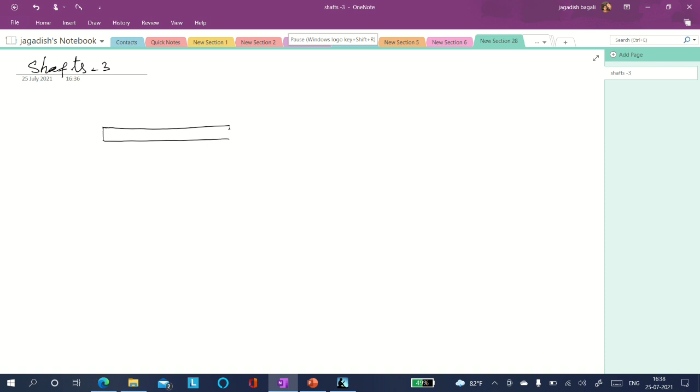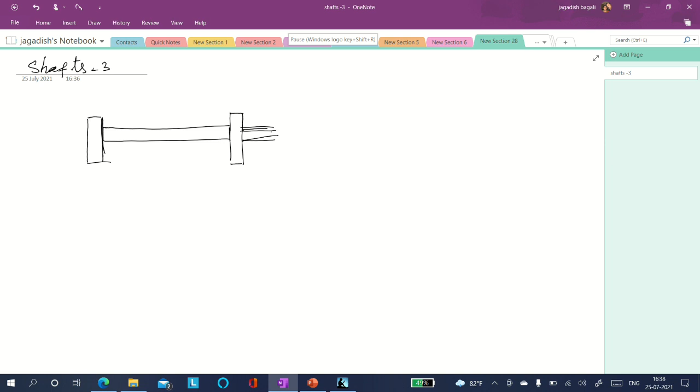ಸೊ ಹಾಗಂದ್ರೆ ಏನು ಅಂದ್ರೆ ಈ ತರ ಒಂದು ಆಕ್ಸಿಲ್ ಇದೆ. ಇಲ್ಲಿ ಏನಿದೆ, ವೀಲ್ ಇದೆ, ಆಕ್ಸಿಲ್ ವೀಲ್ ಇದೆ, ಇಲ್ಲೂ ಆಕ್ಸಿಲ್ ವೀಲ್ ಇದೆ. ಈ ಕಡೆ ಸೈಡ್ ಒಂದು ಬಾಕ್ಸ್ ಇದೆ, ಆಕ್ಸಿಲ್ ಬಾಕ್ಸ್ ಅಂತ ಕರೀತಾರೆ. ಈ ಸೈಡ್ ಒಂದು ಆಕ್ಸಿಲ್ ಬಾಕ್ಸ್ ಇದೆ.

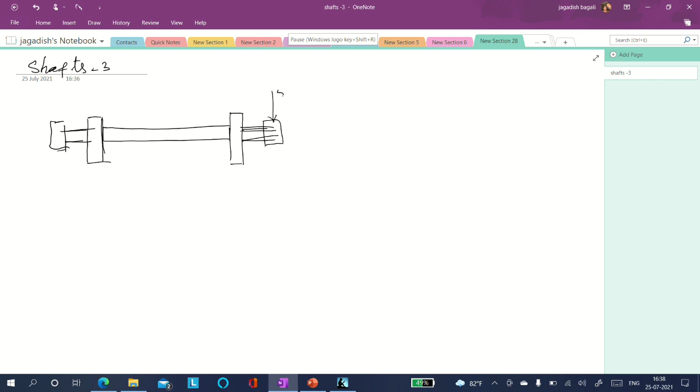ಇದ್ರ ಮೇಲೆ ಲೋಡ್ ಎಷ್ಟಿದೆ, 50 kN. ಇಲ್ಲೂ ಅಷ್ಟೇ 50 kN ಇದೆ. ಇಲ್ಲಿ ಎಷ್ಟು ಬಂದಿದೆ, ಇದು 1.4 ಮೀಟರ್ ಇದೆ. ಫೈಂಡ್ ದ ಡಯಾಮೀಟರ್ ಆಫ್ ಆಕ್ಸಿಲ್ ಬಿಟ್ವೀನ್ ವೀಲ್ಸ್ ಇಫ್ ದ ಸ್ಟ್ರೆಸ್ ಇಸ್ ನಾಟ್ ಟು ಎಕ್ಸೀಡ್ 100 MPa ಅಂತ ಇದೆ.

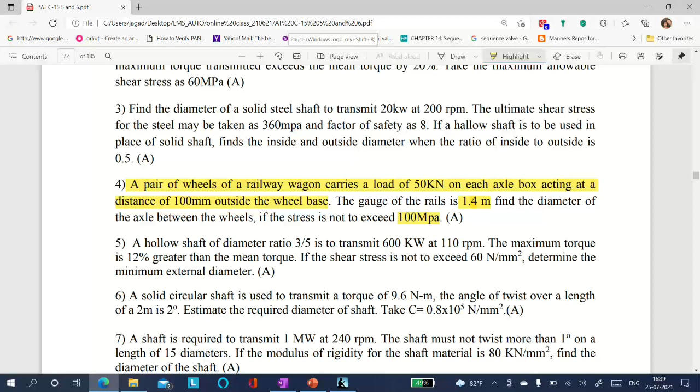ಸೊ ಇಲ್ಲಿ ಸಿಗ್ಮಾ ಡಿ ಅಂತ ಕರೀತಾರೆ, ಅಥವಾ ಸಿಗ್ಮಾ ಬಿ ಅನ್ಬೋದು ನೀವು, ಬೆಂಡಿಂಗ್ ಮೂಮೆಂಟ್ ಸಿಗ್ಮಾ ಬಿ ಇದೆಷ್ಟಿದೆ, 100 MPa ಇದೆ. ಓಕೆ, ಅಂದ್ರೆ ಇದ್ರದ್ದು ಅಲೋಯಬಲ್ ಬೆಂಡಿಂಗ್ ಸ್ಟ್ರೆಸ್, ಈ ಆಕ್ಸಿಲ್ ಮಟೀರಿಯಲ್ ಅಲೋಯಬಲ್ ಬೆಂಡಿಂಗ್ ಸ್ಟ್ರೆಸ್ ಎಷ್ಟಿದೆ, 100 MPa ಇದೆ.

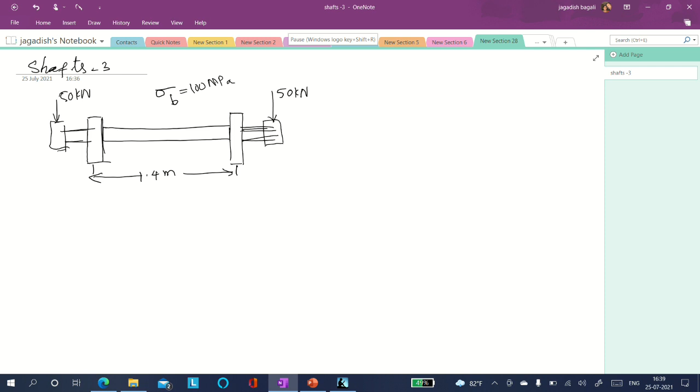ಸೊ ಇದ್ರದ್ದು ನಾವೇನ್ ಮಾಡ್ಬೇಕೀಗ, ಈ ತರ ಒಂದು ಸ್ಕೆಚ್ ಹಾಕೋಬೇಕಾಗತ್ತೆ. ಇದು ಫೋರ್ಸ್ ಡಯಾಗ್ರಾಮ್ ಅಂತ ಕರೀತಾರೆ, ಇದನ್ನ ಹಾಕಬೇಕಾಗತ್ತೆ. ಸೊ ಇಲ್ಲಿ ಎಷ್ಟಿದೆ, 50 kN ಇದೆ. ಇಲ್ಲಿ ಎಷ್ಟಿದೆ, 50 kN ಇದೆ.

ಇವು ಎರಡು ಸಪೋರ್ಟ್ ಪಾಯಿಂಟ್ ಎ, ಪಾಯಿಂಟ್ ಬಿ. ಸೊ ಇದನ್ನ ನಾವು ಎ ಡ್ಯಾಶ್ ಅನ್ಕೋಣ, ಇದನ್ನ ನಾವು ಬಿ ಡ್ಯಾಶ್ ಅನ್ಕೋಣ. ಈ ಪಾಯಿಂಟ್ನ ಈ ಡಿಸ್ಟೆನ್ಸ್ ಎಷ್ಟಿದೆ, 1.4 ಮೀಟರ್ ಇದೆ. MM ಅಲ್ಲಿ ಎಷ್ಟಾಗುತ್ತೆ, 1400 mm ಆಗುತ್ತೆ. ಸೊ ಇಲ್ಲಿ ಡಿಸ್ಟೆನ್ಸ್ ಎಷ್ಟು, ಇದು 100 mm ಇದೆ.

ಇಲ್ಲಿ ಎಷ್ಟಿದೆ ಡಿಸ್ಟೆನ್ಸ್, 100 mm ಇದೆ. ಹೀಗಿದೆ. ಸೊ ಈಗ ಇದದ್ದು ನಾವು ಬೆಂಡಿಂಗ್ ಮೂಮೆಂಟ್ ಅಲ್ವಾ. ಸೊ ಅದಕ್ಕೆ ಒಂದು ಇಕ್ವೇಶನ್ ಇದೆ ನೋಡಿ, ಇಲ್ಲಿದೆ ನೋಡಿ. ಜಸ್ಟ್ ಇಕ್ವೇಶನ್ ನಂಬರ್ ನೋಡಿ, ಇಲ್ಲಿದೆ ಇಕ್ವೇಶನ್ ನಂಬರ್ 3.4b ಅಂತ ಇದೆ ನೋಡಿ.

ಸೊ ಇಲ್ಲೇನಿದೆ ನೋಡಿದೆ, ಹಾಲೋ ಶಾಫ್ಟ್ ಅಂತ ಇದೆ. ಇಲ್ಲಿದೆ ನೋಡಿ, ಔಟ್ಸೈಡ್ ಡಯಾಮೀಟರ್ ಆಫ್ ದ ಹಾಲೋ ಶಾಫ್ಟ್ ಸಬ್ಜೆಕ್ಟೆಡ್ ಟು ಸಿಂಪಲ್ ಬೆಂಡಿಂಗ್ ಅಂತ ಇದೆ ನೋಡಿ. ಸೊ ಈ ಇಕ್ವೇಶನ್ 3.4b ಇಕ್ವೇಶನ್ ನಾವು ತಗೋಬೇಕಾಗತ್ತೆ. ಇಲ್ಲಿ ಇದು ಸಾಲಿಡ್ ಶಾಫ್ಟ್ ಆಗಿರೋದ್ರಿಂದ, ಹಾಲೋ ಶಾಫ್ಟ್ ಅಲ್ಲ, ಇದು ಸಾಲಿಡ್ ಶಾಫ್ಟ್ ಆಗಿರೋದ್ರಿಂದ ಕೆ ವಿಲ್ ಬಿಕಮ್ ಝೀರೋ.

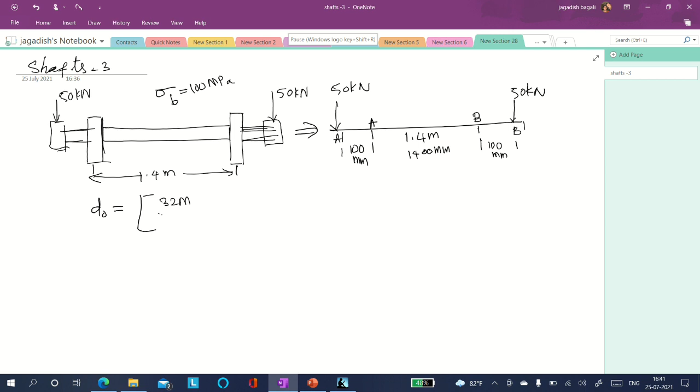ಅವಾಗ ಏನಾಗುತ್ತೆ, ಇಷ್ಟು ಪಾರ್ಟ್ ಬರೋದಿಲ್ಲ, ನಮ್ಗೆ ಬರೋದು ಎಷ್ಟು ಪಾರ್ಟು, ಬರೀ 32m ಡಿವೈಡ್ ಬೈ ಪೈ ಸಿಗ್ಮಾ ಡಿ ಬರುತ್ತೆ. ಇದು ಡಿಒ ಬರುತ್ತೆ. ಸೊ ಡಿಒ ಅಂದ್ರೆ ನಮಗೆ ಡಿನೇ ಇವಾಗ. ಸೊ ಏನಾಗುತ್ತೆ ಇಕ್ವೇಶನ್, ನಮ್ಗೆ ಕೊಟ್ಟಿರೋ ಇಕ್ವೇಶನ್ ಏನಿದೆ, ಅದು ಡಿಒ ಇಸ್ ಈಕ್ವಲ್ ಟು ಏನಿದೆ, ಥರ ಕ್ಯೂಬ್ ರೂಟ್ ಇದೆ. ಕ್ಯೂಬ್ ರೂಟ್ ಆದ್ಮೇಲೆ ಏನಿದೆ, 32m ಇದೆ.

32m ಇದೆ. ಆಮೇಲೆ ಇಲ್ಲೇನಿದೆ, ಪೈ ಡಿಒ ಕ್ಯೂಬ್ ಇದೆ, ವಿದಿನ್ ದ ಬ್ರಾಕೆಟ್ 1 ಡಿವೈಡ್ ಬೈ 1 ಮೈನಸ್ ಕೆ ರೇಸ್ ಟು 4 ಇದೆ. ಆಮೇಲೆ ಇಲ್ಲೇನಿದೆ, 1/3 ಇದೆ. ಹೌದಲ್ವೇ. ಸೊ ಈ ತರ ಇದೆ, ಹೋಲ್ 1/3 ಇದೆ. ಸೊ ದಿಸ್ ಇಸ್ ದ ಇಕ್ವೇಶನ್. ಬಟ್ ಇಲ್ಲಿ ಇದು ಹಾಲೋ ಶಾಫ್ಟ್ಗೆ, ದಿಸ್ ಇಸ್ ಫಾರ್ ಹಾಲೋ ಶಾಫ್ಟ್.

ಬಟ್ ಫಾರ್ ಸಾಲಿಡ್ ಶಾಫ್ಟ್ ಏನಾಗುತ್ತೆ, ಫಾರ್ ಸಾಲಿಡ್ ಶಾಫ್ಟ್ the outside and inside, there is no inside diameter. So when there is no inside diameter, K will be 0. There is no K. So when the K is 0, then what you get is, for D is equal to ಏನಾಗುತ್ತೆ, ಈ ತರ ಆಗುತ್ತೆ, 32m, the capital M, divided by pi DO cube, ಇಲ್ಲಿ 1/3 ಆಗುತ್ತೆ. This is for solid shaft.

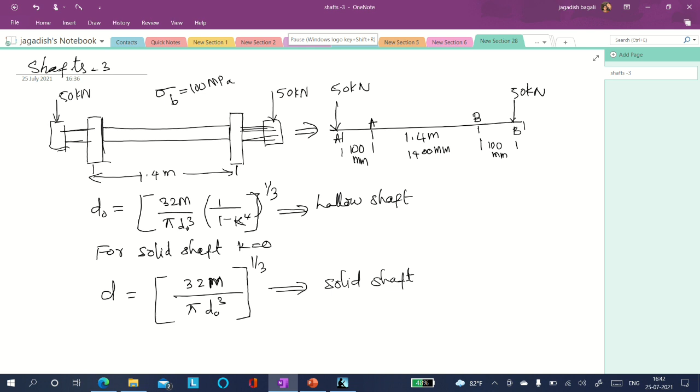This is for solid shaft. This is the equation. Okay. So here, what is M? ಇಲ್ಲಿ DO ಅಲ್ಲ, ಇದು once again D. ಇದು DO ಅಲ್ಲ, ಇದೇನಿದು, ಸಾರಿ, ಇದು

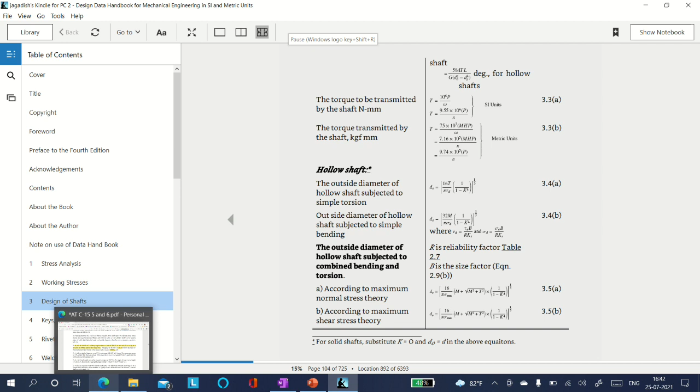So here, what is d? D equal to diameter of the shaft. Diameter of shaft. All right. And what is m? M is maximum bending moment. Maximum bending moment.

Right. And then what is sigma d? Sigma d is, it is allowable bending stress. Allowable bending stress for shaft material. For shaft material. All right. Okay. Now, so we have to, with the sigma d given now.

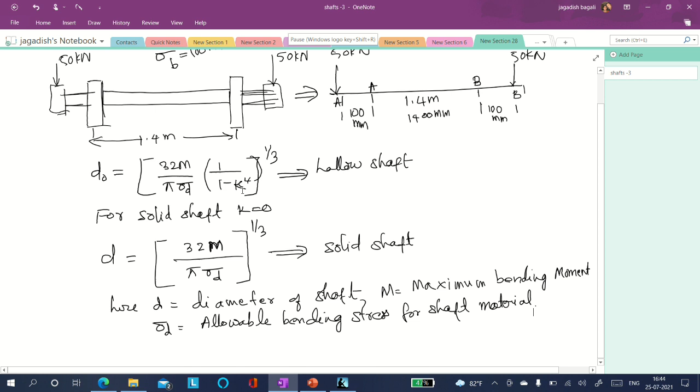Only thing we have to find out this m. How to find out the m? So if you have learnt SOM, you should know the procedure to find out the maximum bending moment. So let us now start doing it. Let us once again draw the sketch, the free body diagram.

So it is like this. So here you got a 50 kilonewton. Here also you got 50 kilonewton, and then here it is A point. This is A and this is B. Let it be A dash, let it be B dash, and this is 1400 mm, and this is 100 mm. This is once again 100 mm. Okay, now first step, bending moment.

So you need to find the reactions now. First, before finding the bending moments, you need to find the reactions at point A and point B. For that, assuming, the first step is assuming the system is in equilibrium.

What are the conditions? The first condition is sigma H equal to 0. Second condition is sigma V equal to 0. Third condition is sigma M equal to 0.

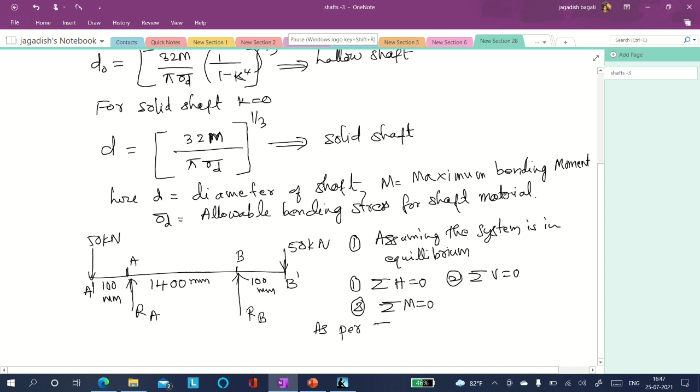So now, as per second condition, that is sigma V equal to 0, what do we get? We get 50 kilonewton is 50 kilonewton plus 50 kilonewton. These are both down, and then Ra, let it be, it is upwards, that is minus Ra. Rb is upwards, therefore minus Rb is equal to 0.

As per this rule, then what happens? It is now 100 kilonewton minus Ra minus Rb is equal to 0.

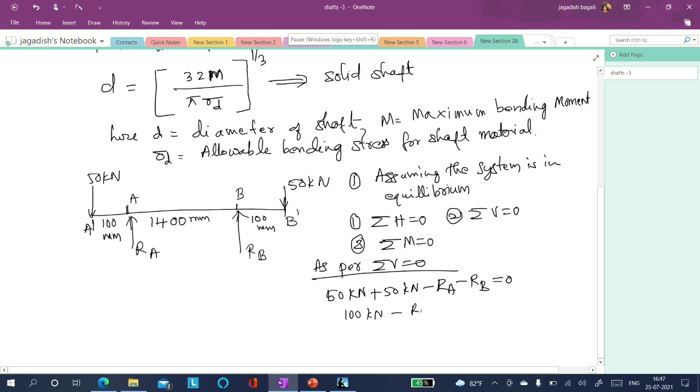Now what happens? Let us move this RA and RB to this side. Now what happens? We'll move this to here. So the symbol will change. The negative symbol will be changed to positive symbol now. Let it be 100 kilonewton here. If they go here, it becomes RA plus RB. So RA plus RB equal to 100 kilonewton.

Since they are symmetric, here you can see the distances from this point and this point, this point and this point, are all the same: 100 mm, 100 mm. Hence RA must be equal to RB. So then what happens? 100 kilonewton is equal to RA plus RA, that is 2 RA. So RA will be equal to RB, that will be equal to 50 kilonewton.

Right, so now this is 50 kilonewton. This is also 50 kilonewton.

Let us take the calculator. That is 50 into 100 is 5,000, negative 5,000. Negative 5,000 plus 50 into 1,500.

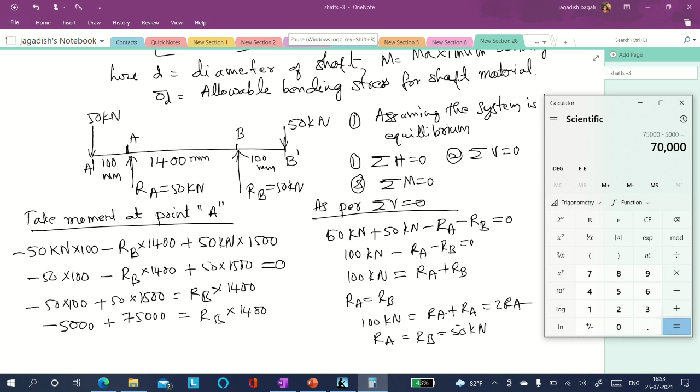50 into 1,500 is 75,000, is equal to RB into 1,400. Now here, 75,000 minus 5,000, what you got is 70,000. You got 70,000 here, is equal to RB into 1,400.

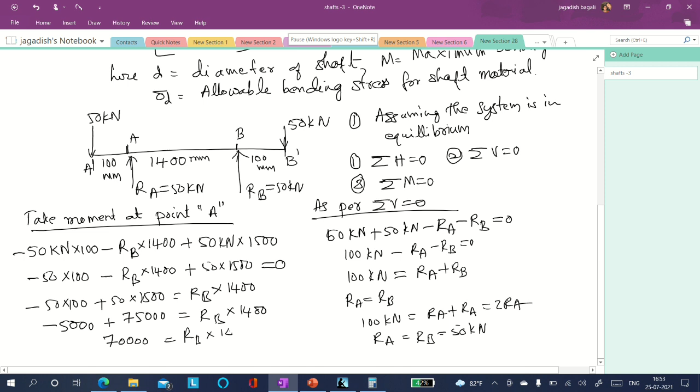Now what is RB? RB equal to 70,000 divided by 1,400. So what is this answer? Divided by 1,400, so you got 50. You got 50, right? 50 kilonewton.

So this is how you have to find the reaction values, the values of reaction force Ra and Rb, if they are not symmetric. Since they are symmetric, I have already used my analytical skills and said that Ra equal to Rb equal to 50. If you cannot judge properly, then you can use this method to find the values of Ra and Rb. Similarly, you can once again calculate.

Once you know the Rb value, you can very easily find Ra value, because here you have an equation: Ra plus Rb equal to 100 kilonewton. So Rb value is 50 kilonewton, means Ra value should be 50 kilonewton.

So you can usually find, we know that Ra plus Rb equal to 100 kilonewton. It is already given, Ra plus 50, that is equal to 100 kilonewton. So Ra value equal to 100 minus 50, this is equal to 50 kilonewton. So Ra value will be equal to 50 kilonewton.

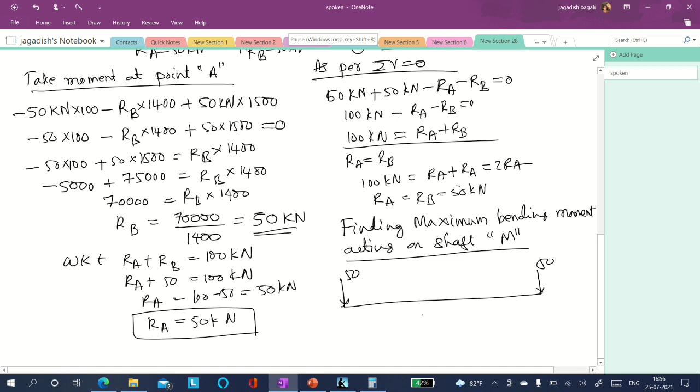The first step is we'll draw that free body diagram once again here, like this. 50, 50. Here also it is 50, here also it is 50. So this is A dash, this is A, this is B, and this is B dash.

Now you have to find out, first step, bending moment BM at A dash. It will be 0. You have to find out only the right side or left side values, you have to only consider the left forces or the right side forces. So now I will consider the right side forces. So the right side forces are...

Now you have got 50, and this distance is 100. This is 1,400 and this is 100. Now the distance between this point, this force 50, and this point are what? It is 100, right?

So it is in the anti-clockwise direction. So let it be negative. 50 into 100. So yeah, the moment due to this force 50 is actually like this, right? It will be anti-clockwise.

Okay, next there is another force, this force, 50. This is also once again anti-clockwise, right? So directions are like this. So once again negative, and that is once again 50. What is the distance? That is 1400 plus 100, that is 1500.

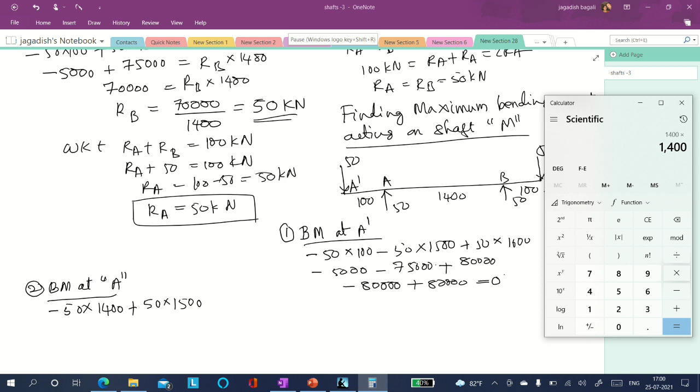Okay, what is the value? 1400 into 50 is... oh sorry, 1400, so this is the problem, cancel, 1400 into 50 is 70,000, right? This is negative, negative 70,000.

Plus this is 75,000 plus 75,000. So what you get is positive 5,000 Newton meter at A.

Similarly, third step, bending moment at B. Once again, you have to only consider the right side force, that is only 50. You should not consider left side forces. So this is only 50 and it is clockwise.

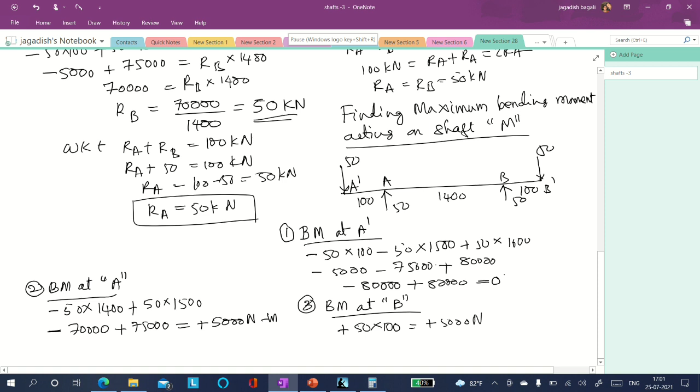Now what is the bending moment? That is positive 50 into 100, that is once again plus 5,000 Newton. You can also consider the bending moment, fourth step, bending moment at B dash.

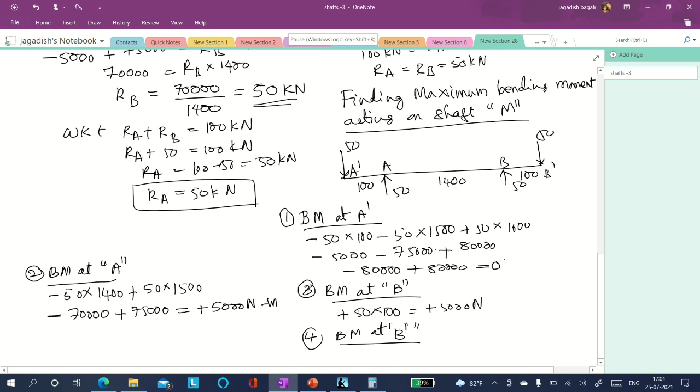So this is, there is no force. After B dash, there is no force at the right side. That means bending moment at B dash is 0. It will be 0.

So now what is the maximum bending moment? The maximum bending moment value is 5,000 Newton. From the above calculation, maximum bending moment on the shaft is M, that is equal to 5,000 only, 5,000 Newton meter.

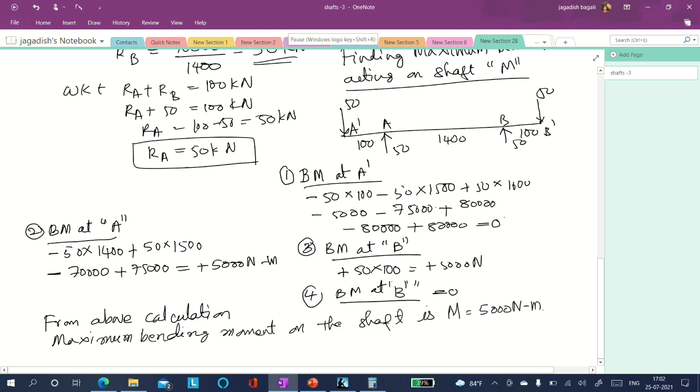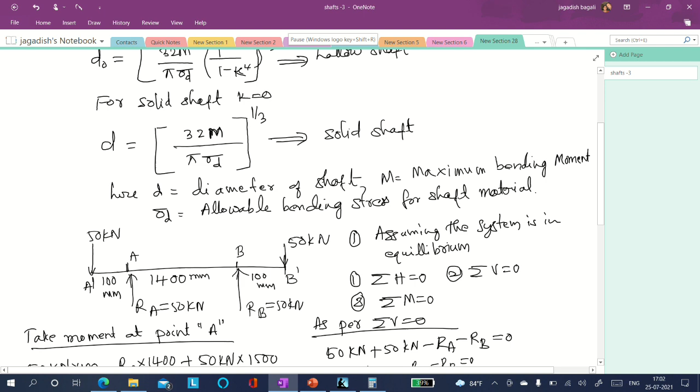So now we have found out the maximum bending moment. Now we have to use this formula, D equal to 32M. This formula we have to use now. D is equal to within the bracket 32M pi sigma D, to the power 1 by 3.

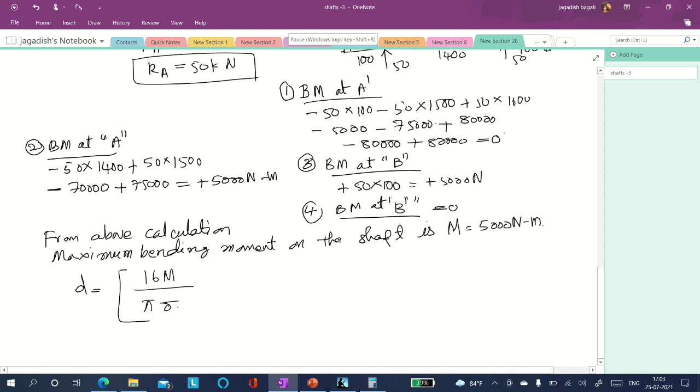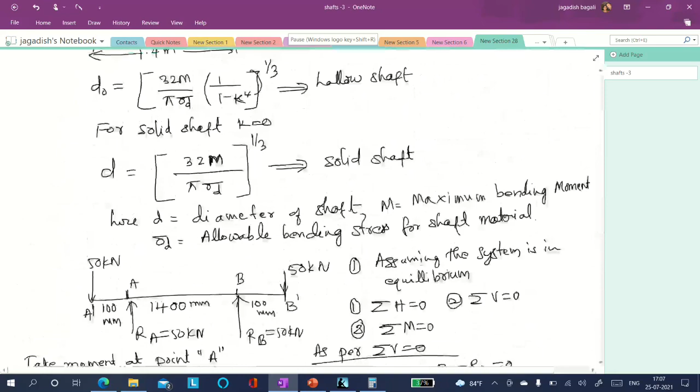This formula we have to use. So that is not 16M, right? So this is not 16M, this is 32M, you can see here. So the formula is not correct. We have to change this. This is not 16M, this is 32M.

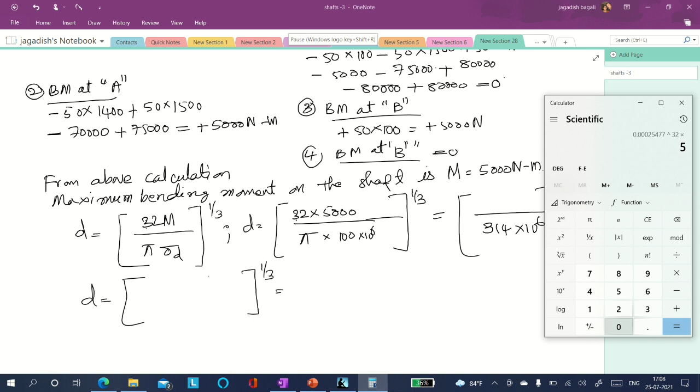This is 32M. So now here it will be 32. So this value will change, and this value will also change. All right. So this is 32. Now 32 into 5000, so let us make it 0, cancel it. So what you got is 32 into 5000 is 1,60,000.

So 1,60,000 divided by 314 is equal to 509.5. This is 509.5 into 10 raised to the power minus 6. All right. Now you have to find out the value of this, into 10 raised to the power minus 6, bracket close is equal to, yeah, this is the value, and the cube root of that, 1 by 3.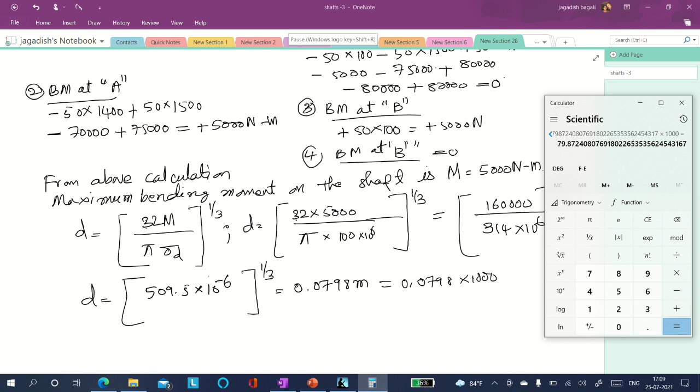Yeah, that is 0.0798. 0.0798 meter. In terms of mm, it will be 0.0798 into 1000. So into 1000, it is 79.87. It is 79.87 mm.

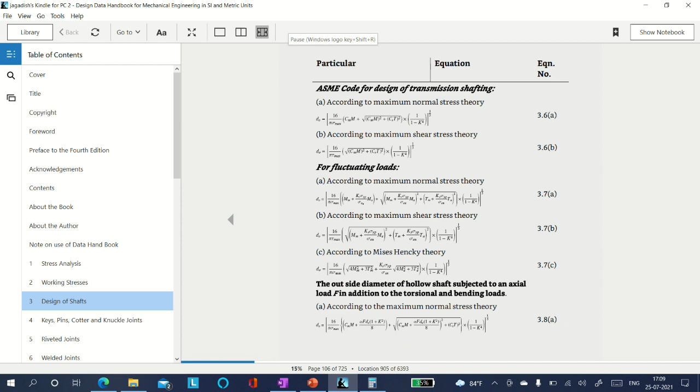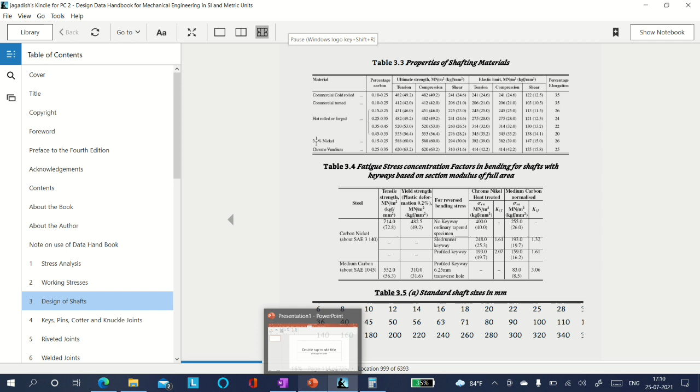So if you go to the standard chart, this chart, so 3.5a, that is 79 point, there is no 79, right? There is only 80. So we have to consider 80. So this is approximately 80 mm as per table 3.5a. In this way, you need to solve this problem.

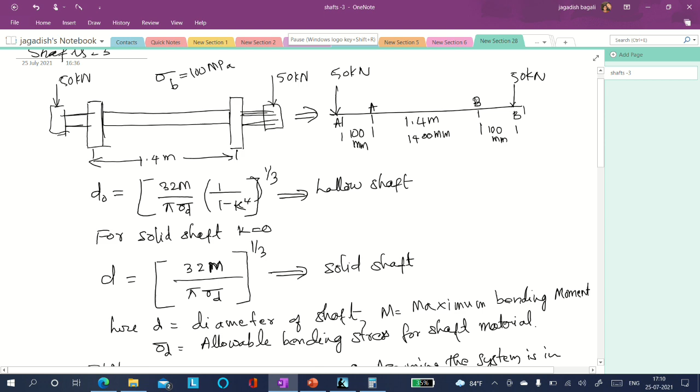So this is a special type of problem in which the shaft is acted upon by bending loads, not twisting loads. So I will summarize the problem. You have to first convert this actual realistic scenario into this force diagram, and then you have to find out the reaction forces at point A and point B. And then once you find out that, I have found here.

So this is the force diagram, and taking moment at point A, I have found out. So while finding out the values of RA and RB, you have to consider both the left side forces and the right side forces, the moments those are acting, while finding the moments. So you have to consider both the left side forces and right side forces, the moment due to this force and this force, you have to consider while finding the values of RA and RB.

You have to consider both left side forces and the right side forces. Right side force like RB and 50 kilonewton.

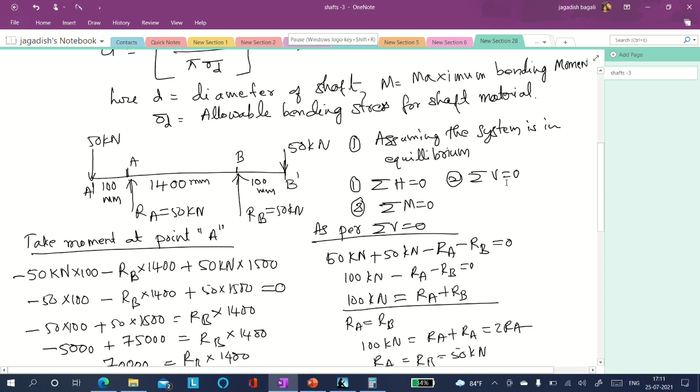Once you find out the values of RA and RB, then you have to assume that, assuming the system is in equilibrium, sigma H equal to 0, sigma V equal to 0, sigma M equal to 0. So here there are no horizontal forces, hence the first one is okay. Second one is sigma V equal to 0.

There are vertical forces acting, that is 50 kilonewton, RA, RB and 50 kilonewton. These are pointing upwards, and these two are pointing downwards. Hence, the downward forces are considered as positive and upward forces are considered as negative. See, negative, negative, and these are positive, positive. So you get this equation, that is RA plus RB equal to 100 kilonewton.

Now you have found out the value of RB here. Put the value of RB in this equation, you will get the value of RA. But since this is an easy scenario, because the forces here are symmetric, the value of RA and RB will be equal to this 50 kilonewton and 50 kilonewton. That is what I did here.

But if in some case, in exams, a force diagram is given which is not symmetric, then you have to use this method. Taking moment at every point, you can find out the value of RA and RB.

Once you find out the value of RA and RB, you have to find out the bending moment at each point, that is at point A dash, point A, point B, and point B dash. While you are in the process of finding the bending moment, you have to only consider one side forces, either the left side force or the right side force. Now in this example, I have considered only the right side forces, not the left side forces. So this is very important.

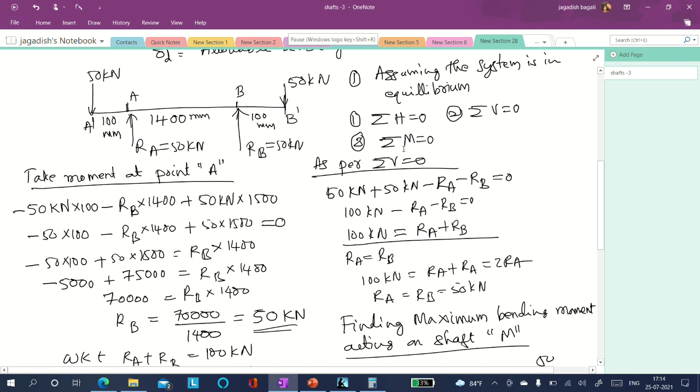See here, bending moment at A dash. So I consider all the forces. A dash means this point. So what are the forces on the right side? You got 50, you got another 50, you got another 50. So I consider all these forces.

This force, the moment due to this force is actually anti-clockwise. Anti-clockwise is considered as negative. So I have taken negative 50, and then the distance is 100, so I multiply by 100. And I have considered this force.

This is 50, and this is also anti-clockwise. What is the distance? 1400 plus 100, that is 1500. So this force, the moment due to this force is clockwise, hence it is considered as positive. What is the force? 50. What is the distance? 100 plus 1400 is 1500, plus 100 is 1600. So the bending moment at this point is 0, right?

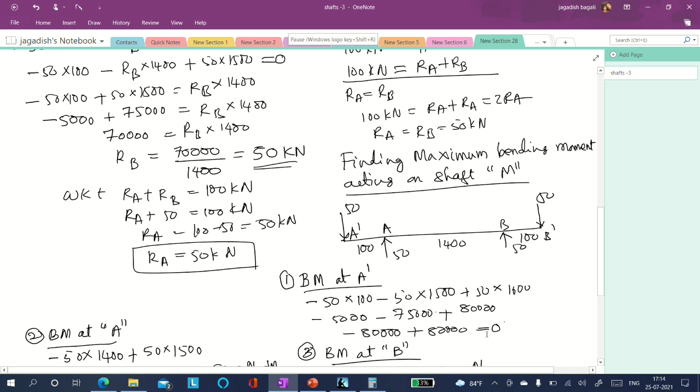Similarly, I have found the bending moment at point A, point B, and point B dash. At point B dash also, bending moment is 0. At point A it is 5000 Newton meter. At B it is once again 5000 Newton meter. So you have to pick the maximum bending moment among all these bending moments.

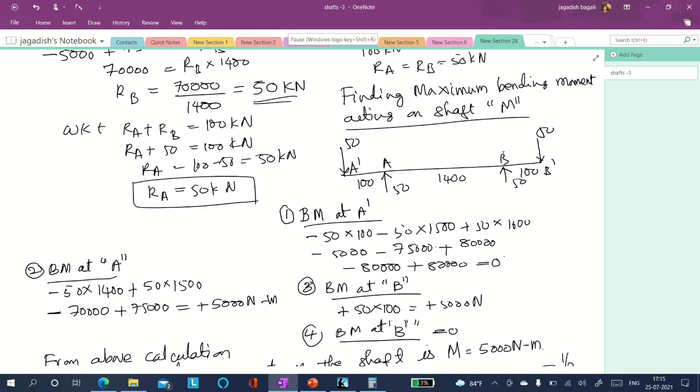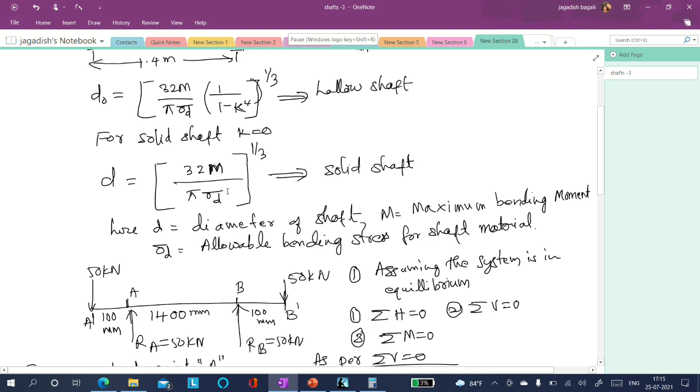Once you find the maximum bending moment, you have to use this formula, that is D equal to 32M divided by pi into sigma D, raised to 1 by 3, where sigma D is the allowable bending stress of the material used to manufacture the shaft, and M is the maximum bending moment. So this is already given. I used that here. M is 5000 and sigma D is 100 megapascal.

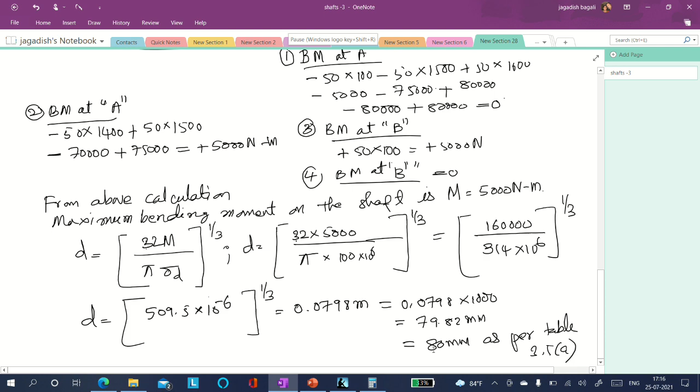So I did it. I got it in meters, but I should convert that into mm, that is why I multiplied this with 1000, because 1 meter is equal to 1000 mm. So that is why I multiplied this with 1000. I got it in mm, 79.82 mm. As per the standard shaft size table, that is 2.5a, we don't have 79.82, we have 80 mm shaft, so we have considered 80 mm shaft. This is how you have to solve the problem.